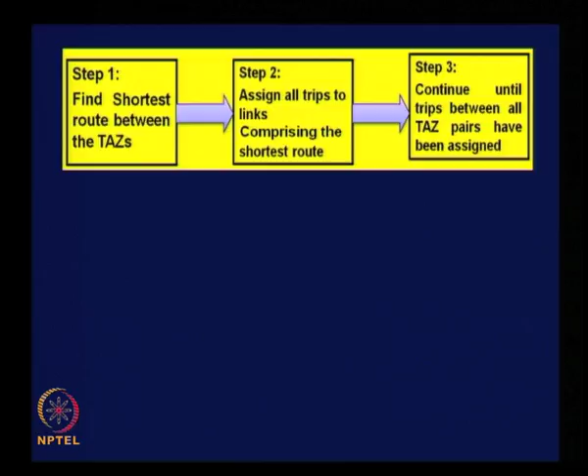This is a simple, inexpensive and fast method of route assignment, because we just develop a minimum path tree and assign the whole of the traffic to the minimum path. That is how it is very fast and simple. This method depicts the routes most travelers would use in the absence of capacity and congestion effects. Basically, we assume there are no problems related to capacity of any link or congestion developed on any particular link. We assume uncongested free flow condition on all the links. Based on that assumption, we assign traffic on all the links comprising the minimum path.

Results of this method are easy to understand and interpret. Interpretation is quite simple and understanding is also relatively easier.

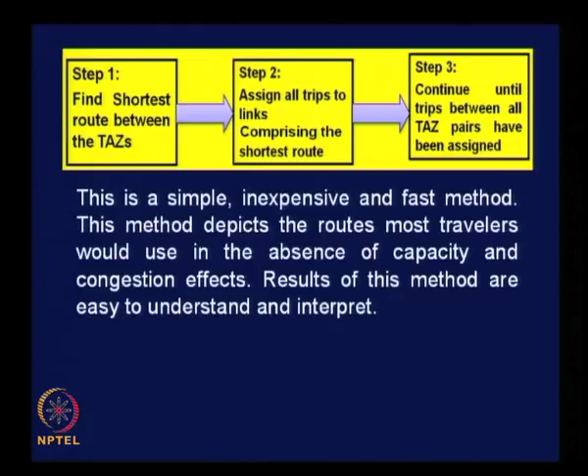Despite these advantages, this method has one serious problem. The disadvantage of this method is that it generates unrealistic traffic assignment in situations where there are minor differences in travel impedance between alternative routes.

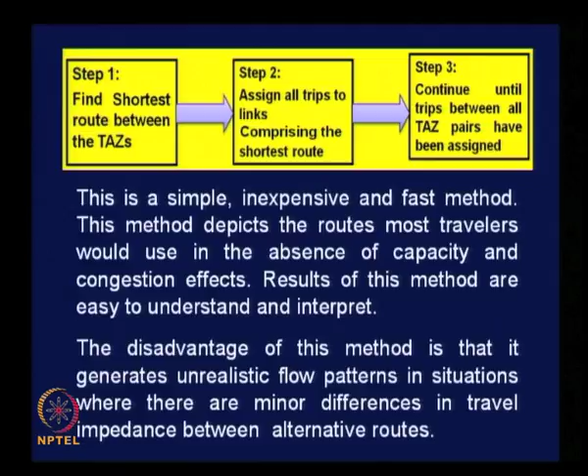Let us say we have 2 alternative routes between zones 1 and 2. If the travel time along route 1 is 11 minutes, for example, and the travel time along route 2 is 11.5 minutes, the difference is minor. In practice, these differences do not matter much. People might use either route 1 or route 2, but as per the algorithm we use for all or nothing assignment technique, the whole of the traffic will be assigned to route 1, which has a travel time of just 11 minutes, leaving the other alternative route with a travel time of 11.5 minutes empty, which is not realistic. So that is the problem with this type of assignment.

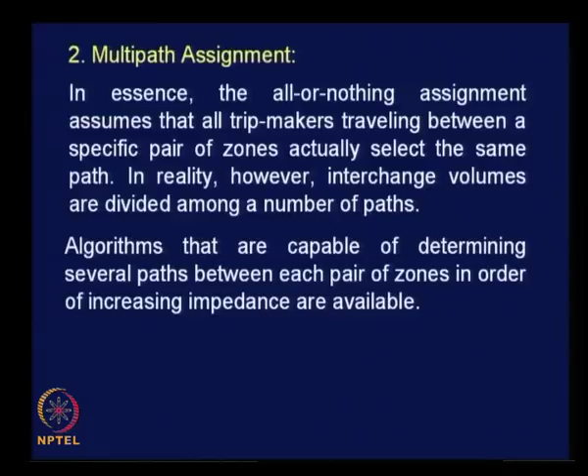The choice of route will depend on the travel time implication. Less the travel time, more is the likely traffic that might use a shorter route compared to a relatively longer route. So we need some kind of algorithm to apportion the traffic among various alternative routes. Therefore, it is possible to apportion the interchange volume between these paths according to some realistic rule.

Can anyone think of some rule to apportion traffic among alternative paths with different travel times, say 10 minutes, 11 minutes, 12 minutes, with 3 alternatives? How to apportion the traffic? One reality is that the 12 minutes path will have relatively lesser traffic compared to the 10 minutes path, because the 10 minutes path is shorter. Shall we say that the traffic taking different routes might be directly proportional to the inverse of the travel times? That is one suggestion given.

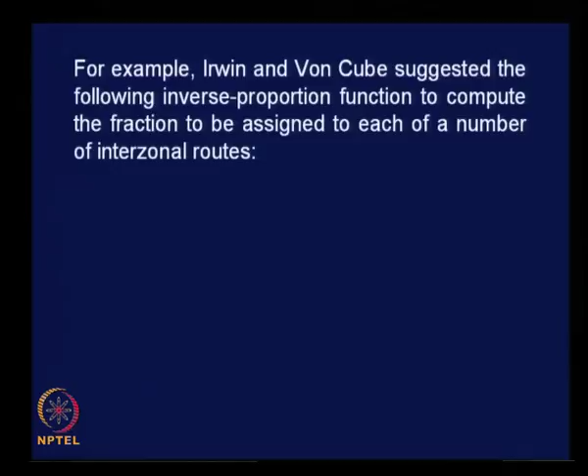Irwin and Von Cube suggested the following inverse proportion function to compute the fraction to be assigned to each of a number of interzonal routes. This is the formula suggested by Irwin and Von Cube.

PR is equal to Wijr raised to power minus 1, whole divided by sigma x equal to 1 to n, Wijx raised to power minus 1.

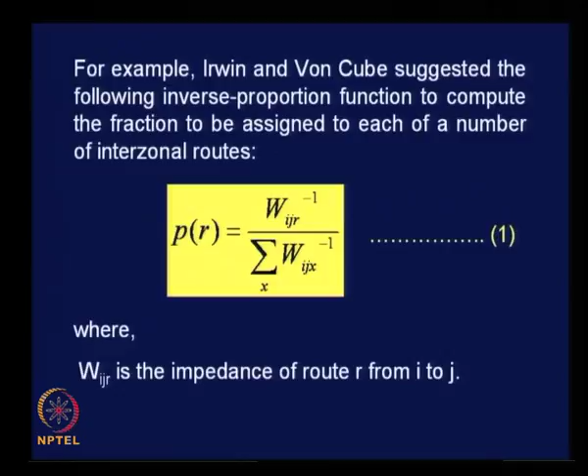Wijr here is the impedance of route R from i to j, for travel from i to j. PR is nothing but the proportion of trip assigned to route R. The inverse of travel impedance of the concerned route is taken in the numerator, and the sum of the inverse of the impedances of all the routes is taken in the denominator.

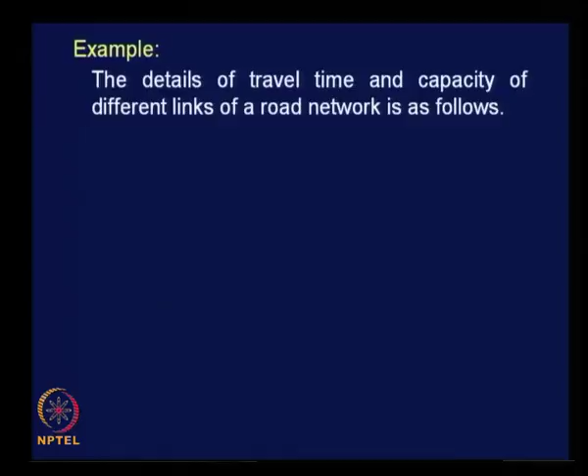Let us take a small numerical example and try to understand the multipath method of traffic assignment.

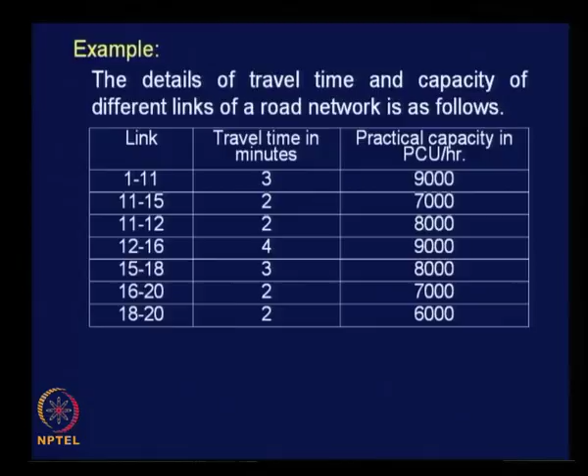You can see node numbers used to designate the links, and the question is this: assign a traffic volume of 9000 PCU per hour between nodes 1 and 20 by multiple route assignment technique. We have to assign a traffic of 9000 PCU per hour for movement from node 1 to node 20.

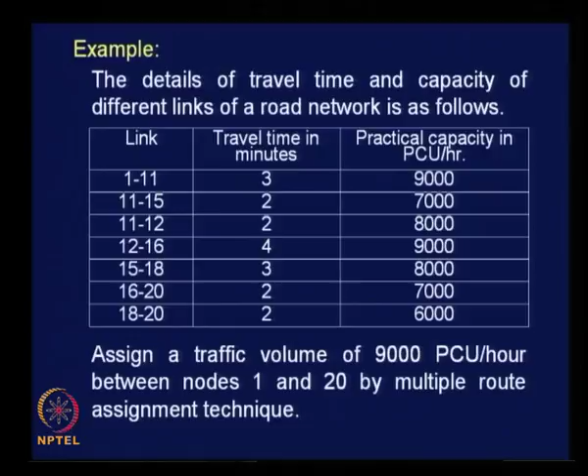Since we have just node numbers used to designate links, it will be convenient for us to make a sketch of the given information to understand the problem better. You sketch out the route network based on the information given in column 1, link information. If you do that, you will get this figure.

The link designations you may recall: 1-11, 11-12, 12-16, 16-20, then 11-15, 15-18, and 18-20.

Our interest is to find out the travel time from 1 to 20 along the 2 alternative routes, and then assign traffic based on the algorithm. What is the travel time along 1, 11, 12, 16, 20?

Travel times are indicated with white colored numbers. So, 3 plus 2 is 5, plus 4 is 9, plus 2 is 11 minutes, and the travel time along the other alternative path, namely 1, 11, 15, 18 and 20, is equal to 3 plus 2 is 5, plus 3 is 8, plus 2 is 10 minutes. So there are 2 alternative paths involving travel times of 10 minutes and 11 minutes.

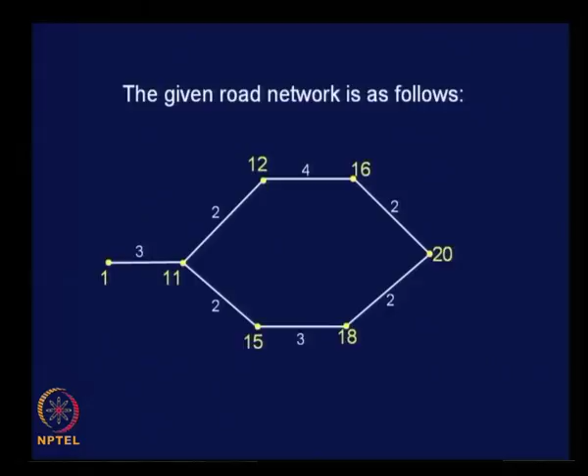So the paths are 1, 11, 15, 18, 20 involving a travel time of 10 minutes, and then 1, 11, 12, 16, 20 involving a travel time of 11 minutes. Simply use the algorithm and get the proportion of traffic to be assigned to the 2 alternative routes.

As per the equation we have seen, the proportion using route 1 is 1 by 10, inverse of the travel time implication, divided by 1 by 10 plus 1 by 11, which is equal to 0.524. The actual volume assigned to route 1 is 0.524 into the total traffic of 9000, which works out to 4716 PCU per hour. That is the traffic volume assigned to route 1 with travel time of 10 minutes.

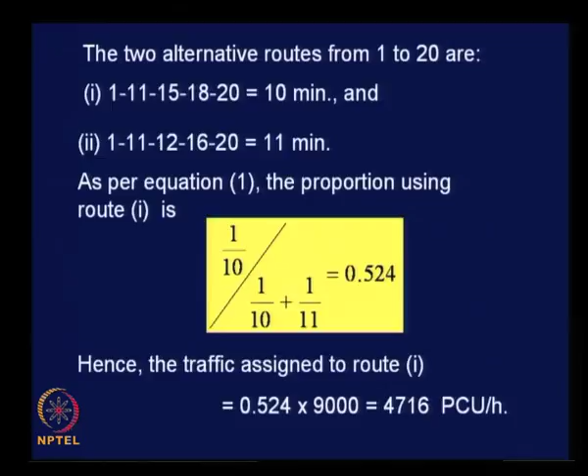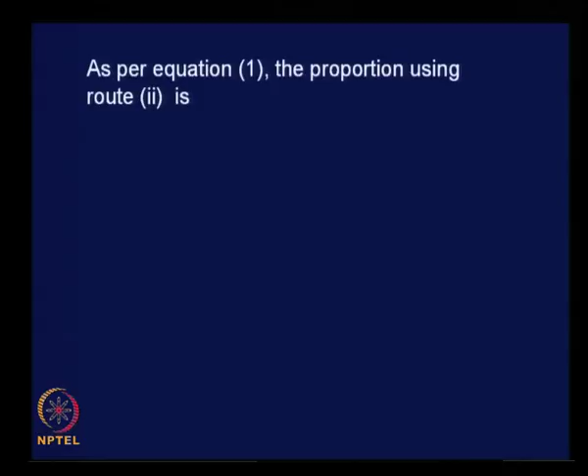As per the same equation, the proportion using route 2 will be 1 by 11 divided by 1 by 10 plus 1 by 11, which is equal to 0.476, and the actual traffic volume works out to 0.476 into 9000, that is 4284 PCU per hour. It is a very simple example, and in practice you may have more number of links involving each alternative route, and sometimes the number of alternative routes available may also be more than 2.

All the links on both the routes have sufficient capacity to take the traffic. Why are we making this statement? Because link capacity is given to us as additional information. You would have seen the third column of the table, where link capacity was given.

Suppose the assigned traffic is slightly higher than the earlier case. If the assigned traffic is more than a link capacity on a particular route, then what to do?

You are apportioning traffic along two alternative routes. Let us say in one alternative route, one of the links may not be able to take the assigned traffic volume. Let us say the assigned volume in this case, as shown here, is 4284, and if the capacity of one of the links is only 3500 PCU per hour, what do you do under such a condition?

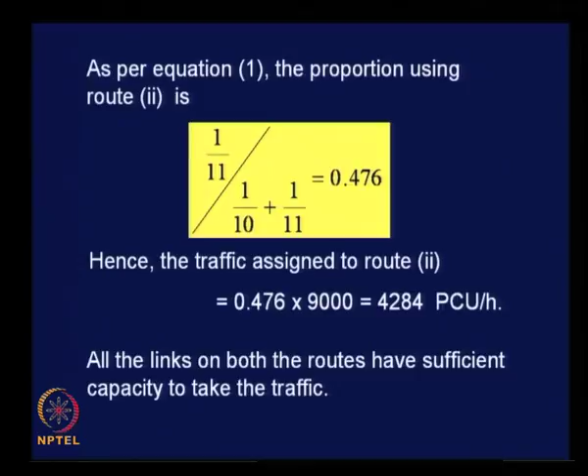It is obvious that you can assign only 3500 PCU per hour along that alternative route, and the balance has to be pushed to the other alternative route, provided the other alternative is able to take this additional traffic. That is how in practice you must manage assignment along various alternative routes. If you are given information about capacity constraint, you should be very careful and check whether the capacity is exceeded. If capacity is exceeded, try to distribute the traffic to other alternative routes.

And use of multinomial logit model. How is use of multinomial logit model relevant at this juncture? All of you are familiar that multinomial logit model can be used for mode choice analysis. We have used the model for mode choice analysis, isn't it? And is it possible to use the model for route choice analysis?

You may recall that I told you about the scope of application of the logit model. Logit model can be applied for any choice situation where randomness is involved. It could be choice between 2-3 consumable items, or 2-3 modes of transportation, or several alternative routes available for choice for making trips.

Basically, it is a question of choosing a particular route, knowing the travel time implication or total travel impedance related to each of the alternative routes. So we have a set of alternatives and we try to understand the way people choose a particular alternative. So instead of using the earlier equation involving the inverse of travel times, you can also use multinomial logit model to explain route choice, to do route assignment.

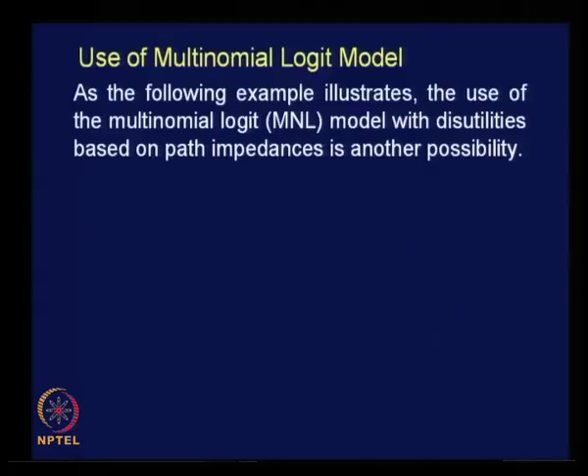So that is why use of multinomial logit model is also appropriate in route choice analysis. It is very simple, it is not going to be difficult because the basic model structure is familiar to you. And as the following example illustrates, the use of the multinomial logit model with disutilities based on path impedances is another possibility.

Let us take a small example. A multipath algorithm found the interzonal impedances in general, not travel time, total impedances of the 4 shorter paths. Why 4 shorter paths?

See, the alternatives should be comparable. There could be several alternative paths if you consider the entire road network. You can go to the next station by travelling around a circuitous route, it is also possible, right. So that cannot be reasonably considered as an alternative route. Alternatives should be reasonably real alternatives. There should basically be shorter paths.

That is where you need to understand the reason for putting the word 'shorter' here - between a pair of zones to be 1, 1.5, 2 and 3 units of disutility. Just units, it is not travel time. The bundle together is given some number as 1, 1.5, 2 and 3 units of disutility. Clear? So you can name it as travel impedance, the total travel impedance along each of the alternative routes.

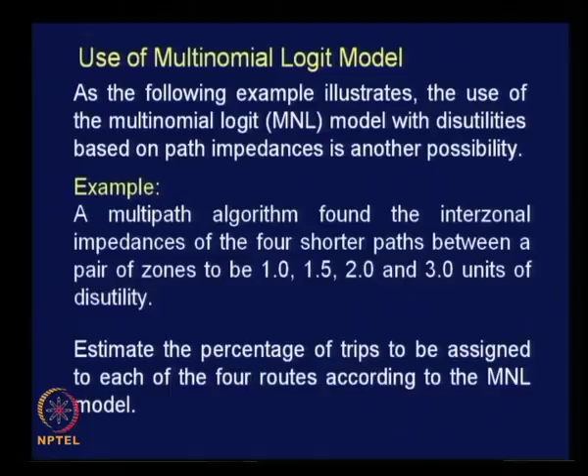Now, the problem is this: estimate the percentage of trips to be assigned to each of the 4 routes according to the MNL model, multinomial logit model. The MNL model structure is given here.

It is the same structure as we have seen earlier. The only difference is a symbol beta is introduced here. This is nothing different - this is just to indicate that the utility function Vj involves estimation of the parameters of the involved variables. It is an indicator, otherwise it has got no different meaning compared to what we have seen earlier. Where Pj is the probability of choice of alternative j, and beta is the parameter to be estimated for the utility function, which is obvious, and m is the number of alternative modes including j.

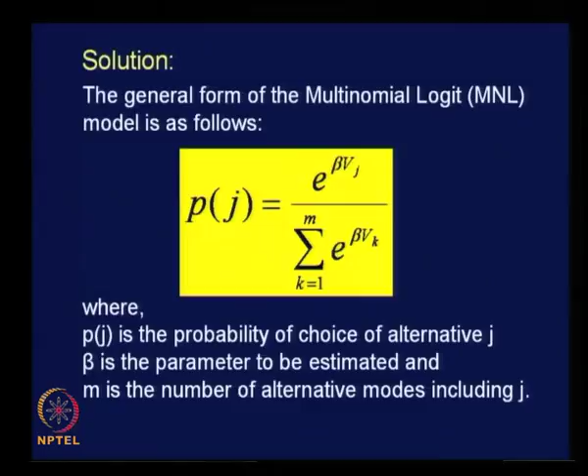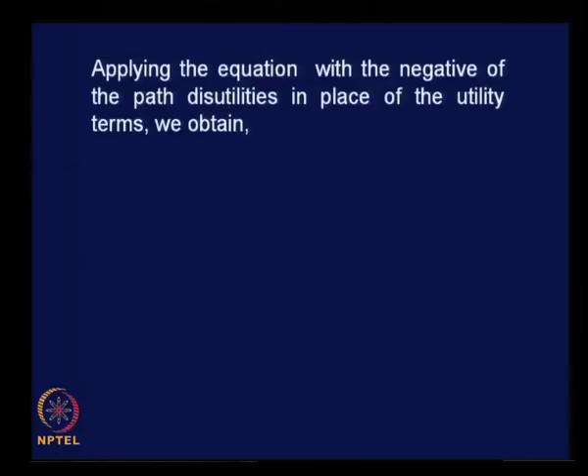That clear? Now, applying this equation with the negative of the path disutilities. Disutilities are given as some numbers, 1, 1.5 etc., and we must take negative of those values for application in the model - e power minus of something. In place of the utility terms, we obtain these results. I am just giving you the probabilities directly because it is simple substitution of the numbers in the equation.

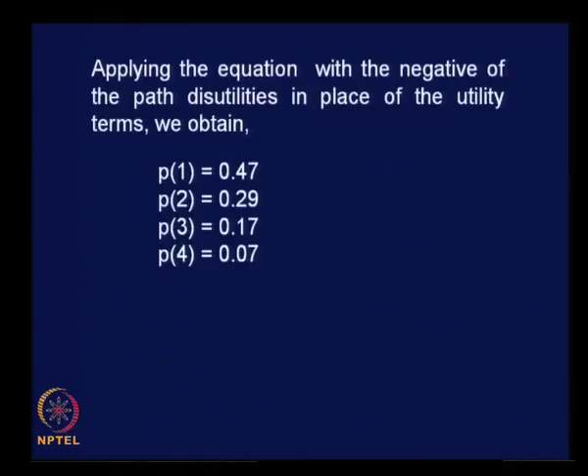Probability of choice of route 1 is 0.47, probability of choice of route 2 is 0.29, route 3 is 0.17, route 4 is 0.07. It is in descending order. You may remember the corresponding disutilities associated with routes 1, 2, 3 and 4 were 1, 1.5, 2 and 3. So when the disutility increases, we find that the probability of choice decreases. We simply substitute those numbers in the previous equation.

The computational complexity of these models should not escape the reader's attention. Of course, computationally this is a little more complex compared to the previous approach where we simply considered inverse of the travel times. But computerized algorithms that deal effectively with this repeated nature of calculations are available, so nothing to worry about. Whatever complexity is associated with the analytical process can be managed with available computer program packages.

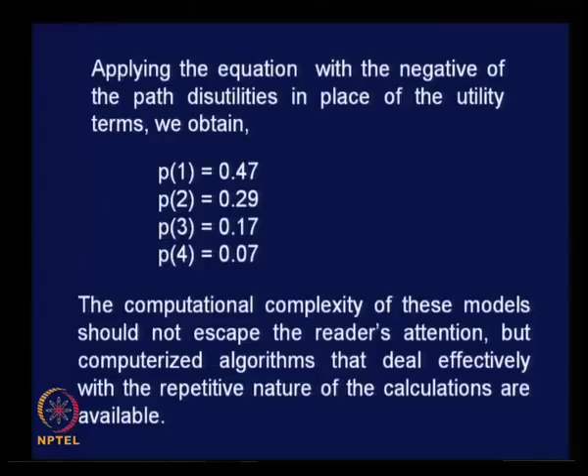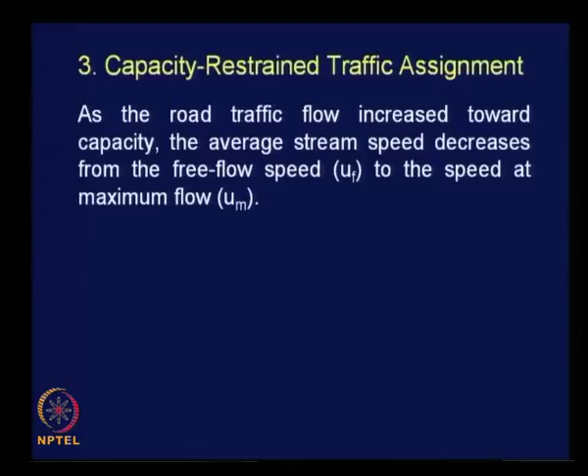Then the third method of route assignment, namely capacity restrained traffic assignment. This is a basic concept to be kept in mind in reality. As road traffic flow increases towards capacity, the average stream speed decreases from the free flow speed to the speed at maximum flow. It changes from Uf to Um, M standing for maximum flow.

Beyond this point, the internal friction between vehicles in the stream becomes severe because of reduced headway. The traffic conditions worsen to give you a level of service of E or F, which is the lowest, and severe shock waves and slow moving platoons develop when the traffic flow increases to reach capacity level.

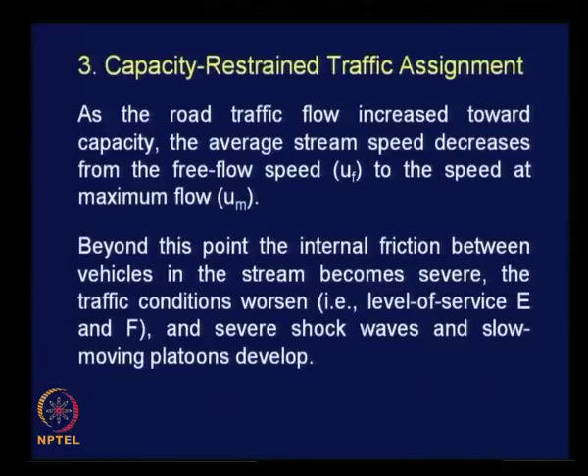It is to be noted that interzonal flows are assigned to the minimum paths computed on the basis of free flow link impedances, usually travel times. So whatever travel times we have been talking about so far are free flow travel times. But in practice, when you think of taking different alternative routes during morning peak hour, you do not perceive only the free flow travel time, you simultaneously perceive the possible traffic condition at that point of time along each alternative route, and the involved travel time under that traffic condition.

That is how we perceive the possibility of taking an alternative route when we try to take a decision in practice. So unless this aspect is taken care of, our route assignment may not be that realistic.

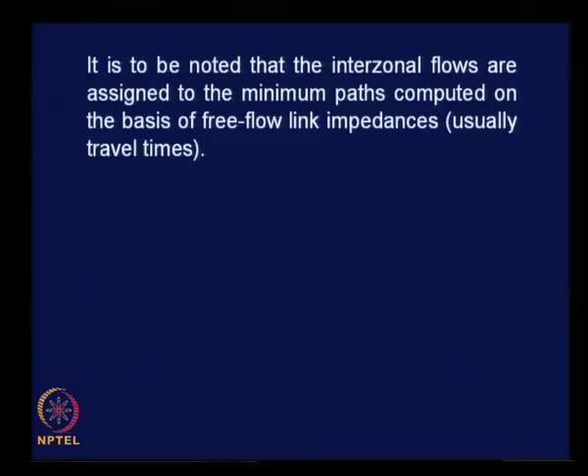But if the link flows were at the levels dictated by the assignment during the assignment process, the link speeds would be lower and the link travel times, that is impedances, would be higher than those corresponding to free flow conditions. This implies that travel times in practice may not be equal to the free flow travel time that we normally consider for assignment under all-or-nothing assignment technique or multipath assignment technique.

As a result, the minimum paths computed prior to trip assignment may not be the minimum paths after the trips are assigned.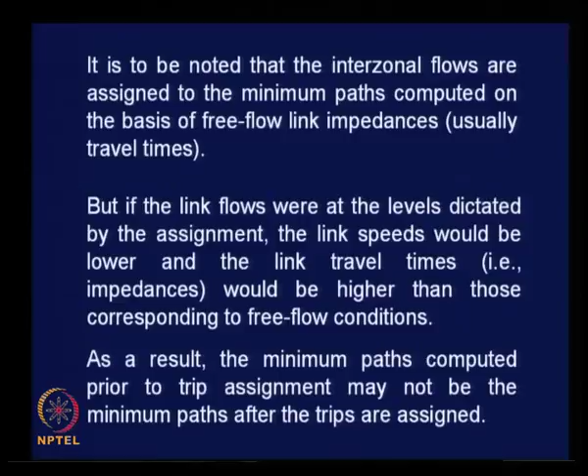You just consider a zonal pair, identify the minimum path tree, and assign traffic based on all-or-nothing assignment technique. Once you assign traffic, a set of links are loaded with traffic volume. When you take another zonal pair and assign traffic, some of the already loaded links will also likely come into the minimum path of the other pair.

In that case, if you do not consider the effective existing traffic volume's effect on travel time, you will not be doing the exercise accurately. So the point made here is when you assign traffic in steps, you must realize that the travel time along the links increases, and that increase should also be taken into account simultaneously while you are doing assignment, so that ultimately at the end of the process the travel time you take will be reflective of reality.

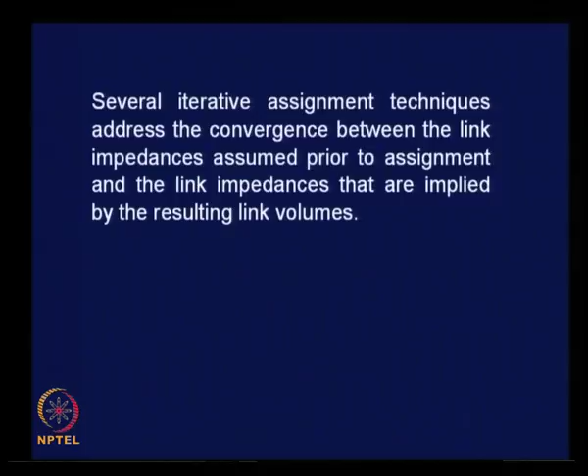For this purpose, several iterative assignment techniques address this particular convergence between link impedances assumed prior to assignment and the link impedances that are implied by the resulting link volumes. These techniques are known as capacity restraint methods.

There are minor variations, several approaches under the capacity restraint technique. We just talk about the general principle implied or involved in the capacity restraint method of traffic assignment, which basically involves consideration of the assigned traffic volumes while estimating the travel time and the resulting minimum path tree that employ capacity restraints.

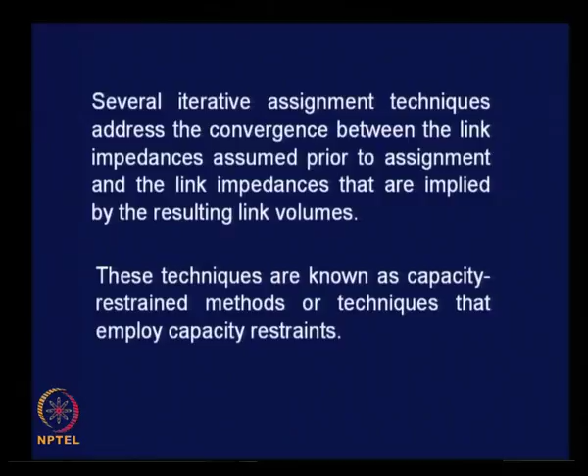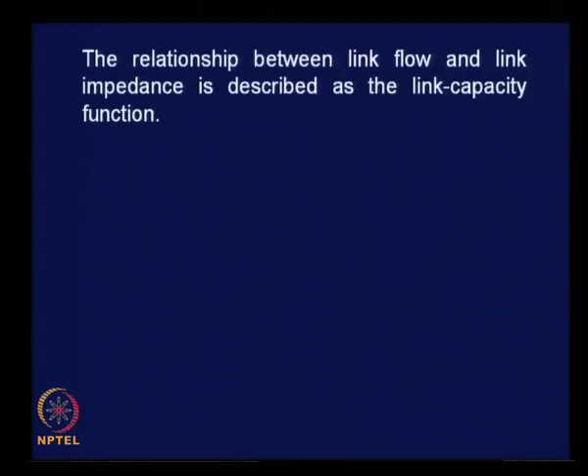The relationship between link flow and link impedance is described as a link capacity function. The key to this process is understanding the relationship between link flow or link volume and link speed. So when you assign some traffic flow onto a link, subsequently the speed is going to be less and the involved travel time is going to be more. So you should know what is the relationship between traffic volume and traffic speed.

If you assign, say, traffic volume to an extent of 20% of capacity of a link, what will be the extent of reduction of speed from free flow speed? That question has to be answered if you want to effectively apply the capacity restraint method of traffic assignment. That is a prerequisite.

Several such functions are found in the technical literature. A number of researchers have come out with functions relating traffic volume and traffic speed. The functional form developed by BPR, Bureau of Public Roads, USA, is expressed mathematically as follows, and is more commonly used by different agencies and countries. This is the BPR equation, which is very simple.

W is the impedance of a given link at flow Q. We are interested to know the impedance on a link at a given flow level, given here as W. W bar is the free flow impedance of the link. Under free flow condition, we should know what the impedance or travel time implication is, given here as W bar. Q is the link flow, the actual flow at any point of time, and Q max is the link's capacity.

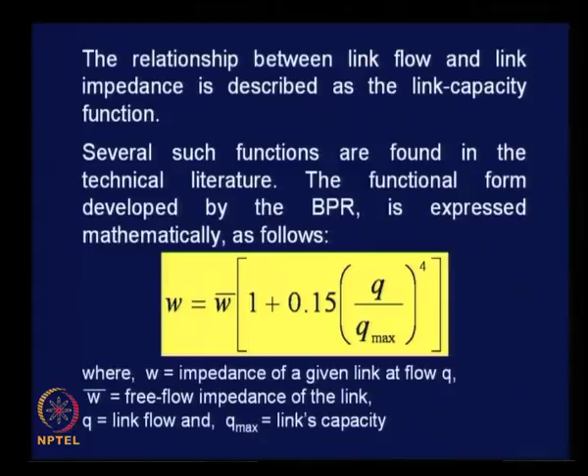W is given in terms of W bar, estimated as a free flow impedance multiplied by some factor. Looking at the multiplying part, you get numbers 0.15 and an exponent of 4. These numbers are the result of calibration of this equation based on field observed data in the United States. So we can call this an empirical equation which relates the travel impedance on a link at a given traffic volume to the free flow impedance condition, W bar.

Please remember, this is for the condition prevailing in the USA. But if you perceive the difference between free flow condition and capacity flow condition on Indian roads, the percentage is going to be much more.

What is the free flow speed for a motor vehicle, for a car, on urban roads in Indian cities? When you are allowed to drive freely as you desire, what speed will you maintain on urban roads? Still, you cannot drive very fast blindly, you have to be careful. Maybe let us say the free flow speed is 70 kilometers per hour.

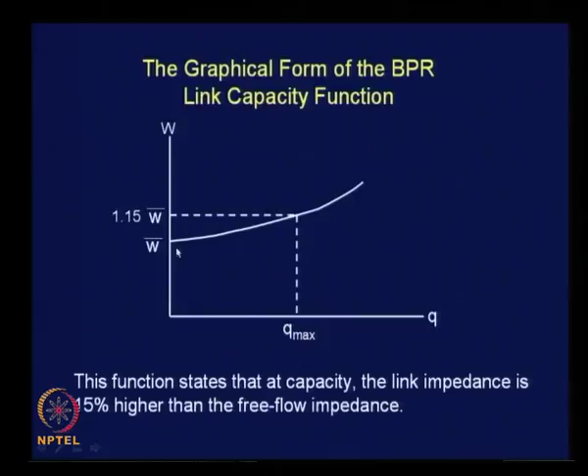When the traffic is near capacity on the same road, can you imagine the speed you will be able to maintain? Roughly about 20 kilometers per hour or even less. There will be a drastic reduction. So obviously, this number is not going to be valid for Indian conditions. That is to be remembered very carefully. We should not simply assume this 15% and try to apply it for conditions prevailing here. Even in the US, there were questions about these calibrated values, and subsequently changes were made.

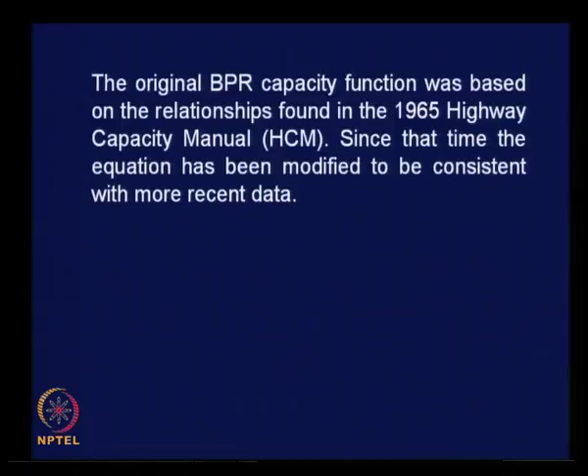The original BPR capacity function was based on relationships found in the 1965 Highway Capacity Manual. The equation we have seen pertains to the traffic condition, roadway and traffic condition that prevailed in the 1960s. Since that time, the equation has been modified to be consistent with more recent data. One modification was to substitute parameters alpha and beta in place of the constant values 0.15 and 4, allowing these parameters to take different values depending on facility type, design speed, the number of signals and other interruptions per mile, and a few other roadway and traffic characteristics.

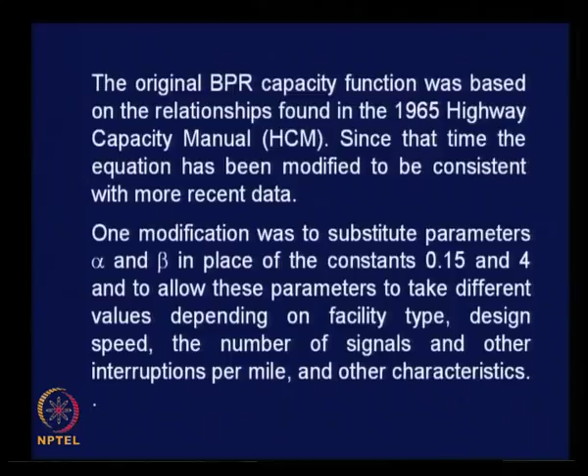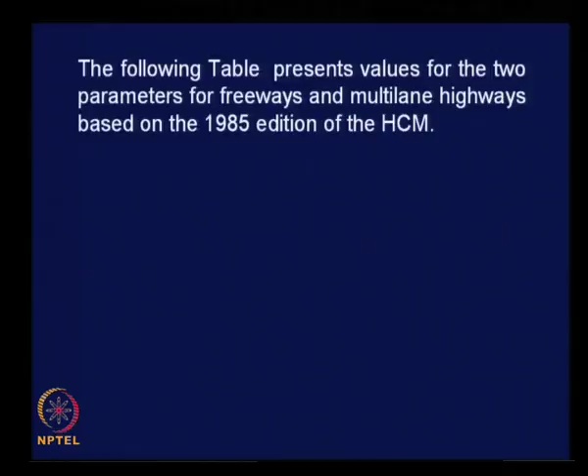They gave the values in tabular form in the year 1985. In the 1985 edition of HCM, you find this information. They classified roads into two types: freeway and multi-lane roads. Freeways are roadways with unrestricted traffic flow condition, while multi-lane roads have frequent interruptions for traffic flow. Constrained traffic flow condition prevails on multi-lane roads, and freeways have unconstrained traffic flow condition.

The design speeds given were three values: 50 miles per hour, 60 miles per hour, and 70 miles per hour for both categories of roads, with the values of alpha and beta given separately for each category. In general, you can find that the values of alpha for multi-lane roads are relatively more compared to freeways, and when you look at beta, it is less.

This implies what? You can look back at the equation you have seen and try to perceive the effect of traffic volume and speed. Normally, on inferior type of facility, the effect will be more significant compared to superior type of facility. That is the general understanding, and that is what is meant by these relative changes in the alpha and beta values.

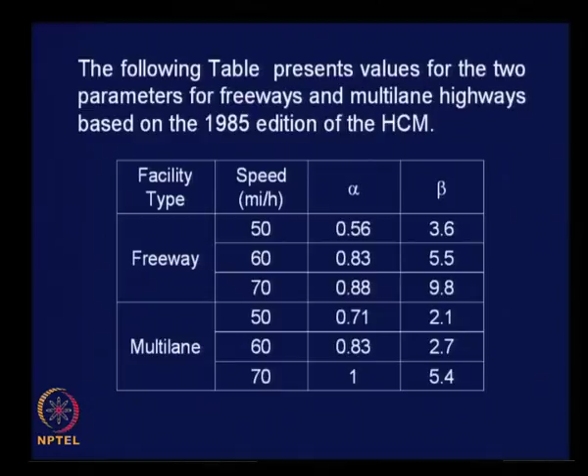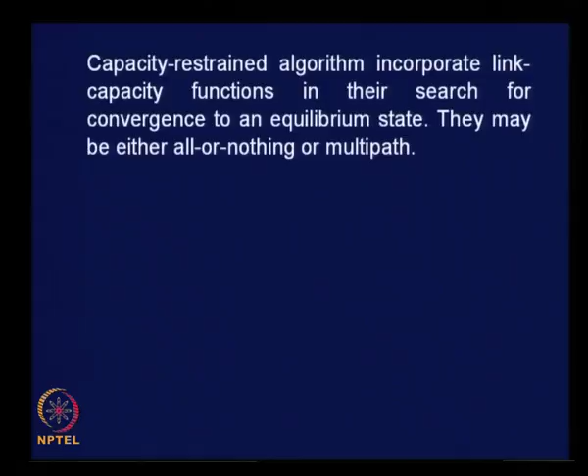Capacity restraint algorithms incorporate link capacity functions in their search for convergence to an equilibrium state. They may be either all-or-nothing or multipath. This statement is very important, so I will repeat it: capacity restraint algorithms incorporate link capacity functions in their search for convergence to an equilibrium state. This is a component of the general method of route assignment.

This capacity restraint technique helps us bring in a kind of equilibrium in traffic flow in the road network, with due consideration to change in travel time because of change in traffic volume during the assignment process. But the actual assignment technique adopted will still be either all-or-nothing or multipath assignment. We follow only these first two basic methods. Capacity restraint assignment is only the part which enables better application of all-or-nothing or multipath assignment techniques.

An example of the former, all-or-nothing assignment technique, is an algorithm developed for the Chicago Area Transportation Study, the CATS study, where the following assignment procedure is applied. Now we are going to see how to apply all-or-nothing assignment technique with incorporation of the principle of capacity restraint.

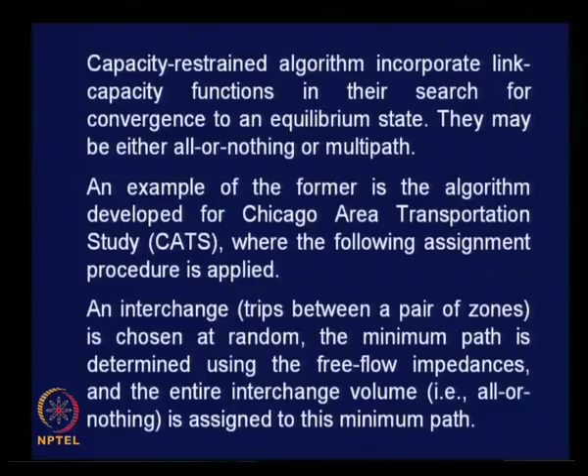You may have thousands of links and nodes, but when you consider one interchange, one zonal pair, the number of links and nodes involved may be very small compared to the total number. In that case there's nothing wrong in assuming free flow condition and assigning traffic — that is not the end of it, it is only the beginning.

So that is what is done as step 1. Then the impedances of the links that make up this path in step 1 are updated according to the assigned flows, and another interchange is randomly chosen for similar treatment.

So after assigning traffic we change the impedances or travel times for all the involved links. Is it possible or not? We take one pair of traffic zones and assign traffic from one zone to another.

After identifying the minimum path tree, a set of links will be loaded with some traffic. Because we assign some traffic, for subsequent assignment on the same link when we consider some other zonal pair, we need to know the exact travel time. It will not equal the free flow travel time, because we already have some traffic assigned on these links.

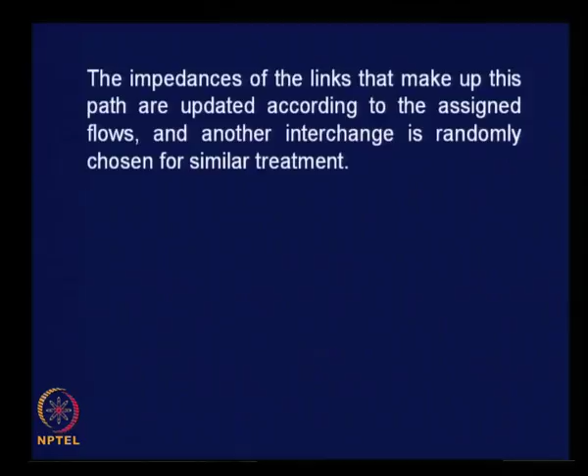The procedure ends when all interchanges are considered. When you do this mechanically, you will find that you are simultaneously changing the travel impedance for the concerned links, and this process enables you to realistically assess the travel impedance and assign the traffic. This is what was done in the CATS study.

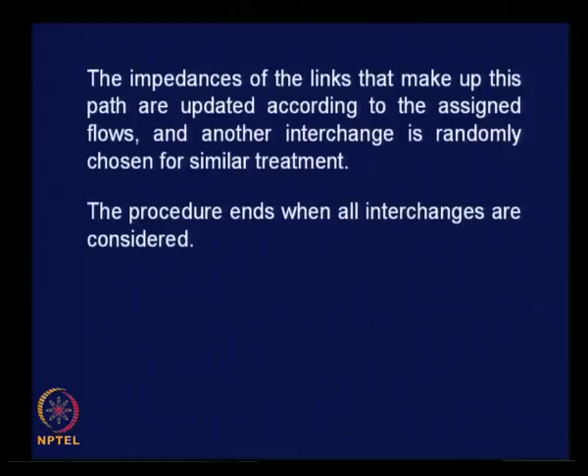Although not realistically reproducing particular interchange flows—if you consider a specific zonal pair, it may not be very realistically interchanging, reflecting the actual interchange—the incremental updating of link impedances is expected to result in realistic estimates of the equilibrium in link flows. Ultimately, at the end of the exercise, you will find that there is some equilibrium maintained in the whole of the transport system network. That is the idea.

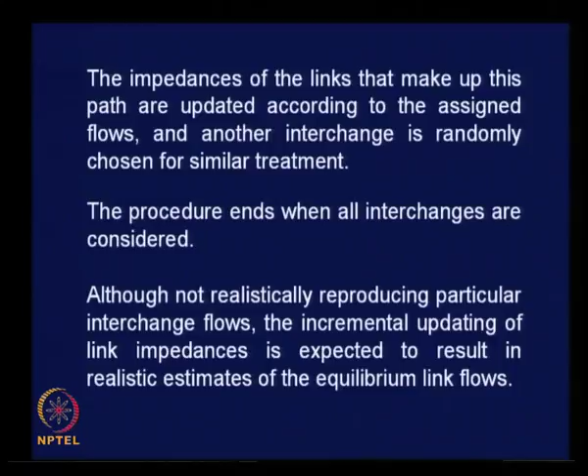Now let us see how to go about doing the same exercise by multipath assignment technique, incorporating capacity restraint in the multipath assignment procedure. A multipath extension of the same CATS method begins with an uncongested network, or network under free flow condition, finds all of the minimum paths, and assigns a portion, say 20%, of each interchange volume to these paths.

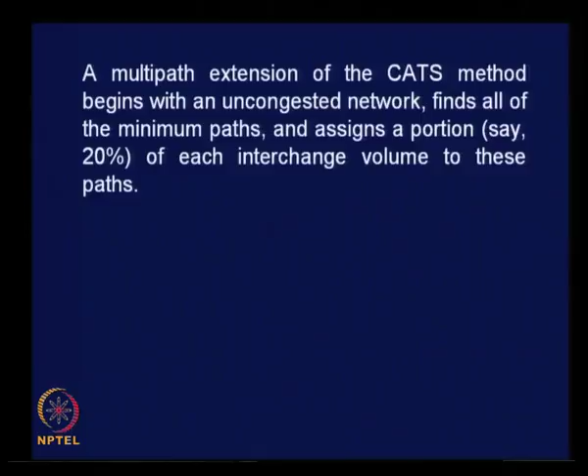Are you able to follow this statement? What we do is, we consider all the zonal pairs to start with and identify the minimum path for zonal pair travel. That means the minimum path for any movement from one zone centroid to another zone centroid, for the whole of the urban area or road network, is first determined. Minimum path for all cases is first found, then you assign a portion of the total traffic volume between zonal pairs initially to start with. Do this for all the zonal pairs again.

For example, you take 20% of the total traffic volume and do the assignment for all the zonal pairs covering the entire road network. That means the whole network will be loaded to an extent of 20%.

Now you revise the travel impedance based on the assigned traffic volume. Once you put 20% of traffic, your travel time is not going to remain the same—it is going to increase—and you have the relationship between traffic volume and traffic speed. So get the speed for each of the links after assigning 20% of traffic, and then work out the corresponding travel impedance in terms of travel time. So that is the new travel time for you.

Once you have changes in travel time, you will find the minimum path trees also change. Again, before you start the next assignment process, you must determine the minimum path tree again for all the zonal pairs covering the whole of the network. Once you complete that, you assign another 20%, say for example. So, like that you do assignment in stages and complete the process covering the whole of the traffic volume, maybe in 2, 3, 4 or 5 stages.

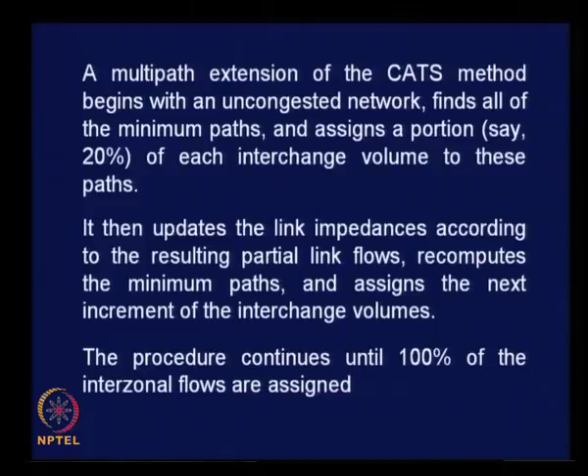So that is about the 3 methods of route assignment. All these discussions are relevant for assigning traffic when private or personal transport modes are used.

Then how to assign traffic when the travelers use transit service? In the case of private transport modes, we easily convert person trips into equivalent vehicular trips and then just assign traffic in terms of number of vehicles. But in the case of transit, they are plying on fixed routes, and you cannot just convert the person trips into equivalent number of transit vehicles.

Even from a traffic zone, if you convert all the person trips into equivalent vehicle trips, you may end up with say 1.5 wagons of train service. That is not the realistic way. There should be some other procedure to be followed for assigning transit trips.

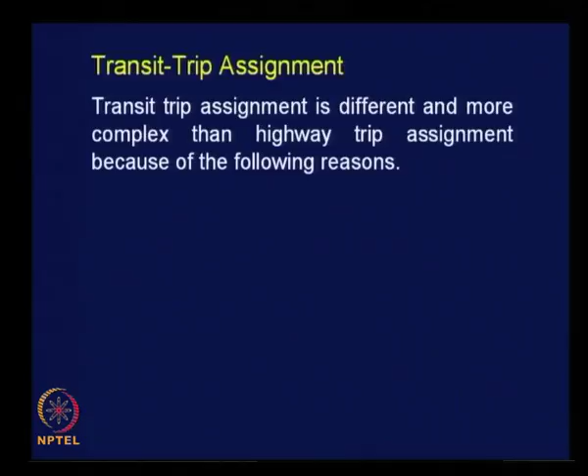Transit trip assignment is different and more complex than highway trip assignment because of the following reasons. The first is this: the network of transit services is different from that of personal vehicles. That is one thing—the network is totally different. Links in this network include bus or rail service running between two stops or stations. The definition of links or nodes are not relevant for transit trips in the same way.

As far as transit trips are concerned, say for example, the transit service that you consider is a bus service—each bus stop is a node, not the intersections. Each bus stop will be considered as a node in your transit network. Similarly, each railway station will be a node in your rail transit network. That is a major difference.

Many of the public transit services share road links with private vehicles, so their speeds will be changing from link to link. You cannot have a generalized free flow speed, etc. This complexity has to be tackled by some means. I am just listing the differences between transit assignment and the previous case. Okay.

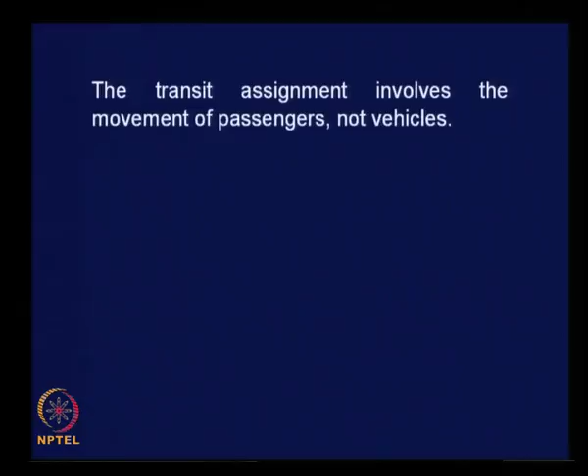The transit assignment involves the movement of passengers, not vehicles. So we must consider only passengers to be moved using the available transit service. If there are 100 people taking a bus during morning peak from a zone, you push them into the available transit vehicles in batches. Let us say the frequency of bus service in 1 hour is about 5 on a particular route. Then divide this total number into 5 batches and push them into the buses. So we are assigning only person trips as far as transit assignment is concerned. It is a major difference.

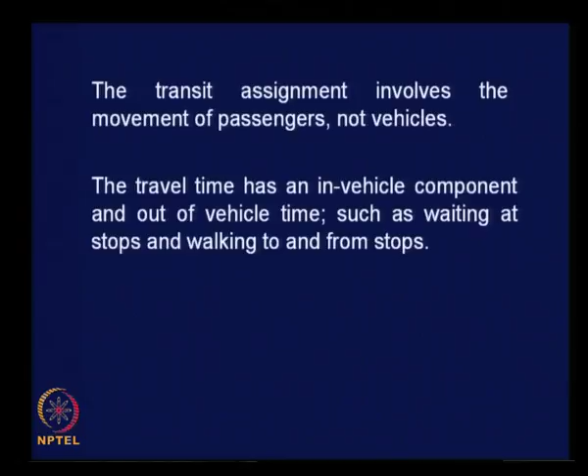The travel time has an in-vehicle component and out-of-vehicle time, such as waiting at stops and walking to and from stops. So when you think of travel time components, you should not just think of only in-vehicle travel time when you estimate travel times in the case of transit trips.

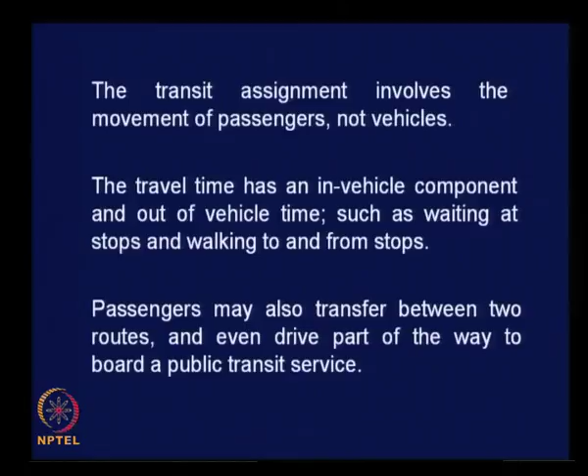Passengers may also transfer between two routes and even drive part of the way to board a public transit service, use a bicycle to go to the railway station, park the bicycle and take the train, or use a motorized two-wheeler. So it becomes a multi-mode transportation. All these effects are to be brought into your analysis process. I am just listing the complexities only.

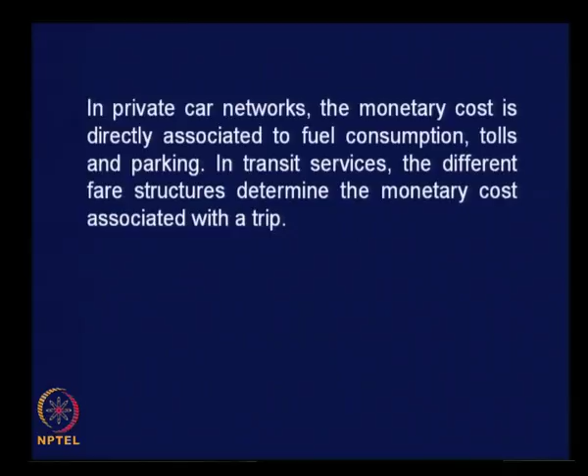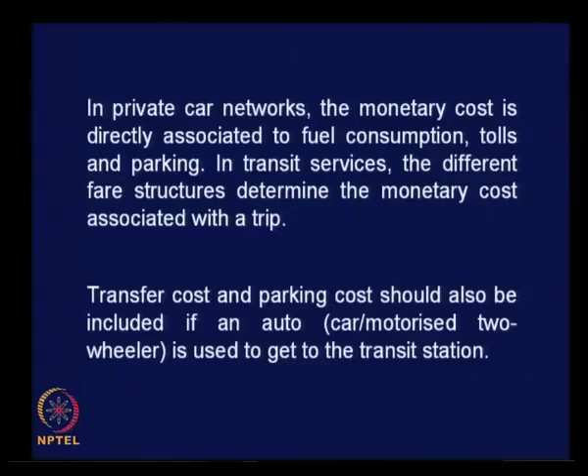In private car networks, the monetary cost is directly associated with fuel consumption, tolls and parking fees. In transit services, the different fare structures determine the monetary cost associated with a trip. If you are including a cost component in your travel resistance, this difference has to be understood clearly. Transfer cost and parking cost should also be included if an auto, car, or motorized two-wheeler is used to get to the transit station, as I mentioned earlier. So these are the differences between transit assignment and route assignment in the case of personal transport vehicles.

For some OD pairs, there may be sections in the path where more than one parallel service is available. Let us say the travel time implication is 50 minutes. For the first 10 minutes, the person may have only one transit service available, and later on for the next 30 minutes of travel, there may be train service as well as bus service available in parallel. Some might switch over to the other transit mode because it is more convenient or comfortable compared to the other one. So this kind of change, availability of more choices, should also be taken into account when you assign traffic.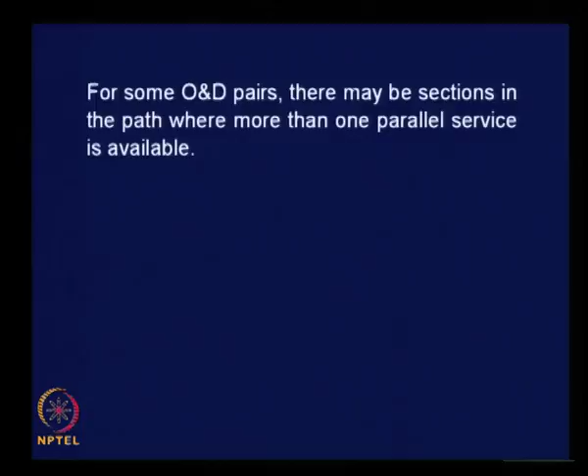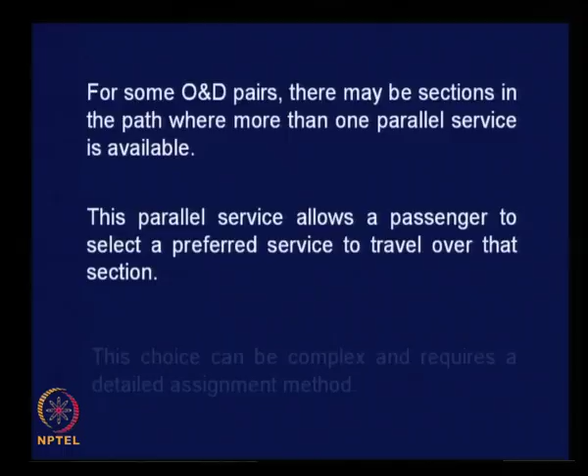This parallel service allows a passenger to select a preferred service to travel over that particular section. This choice can be complex and requires a detailed assignment methodology to be followed.

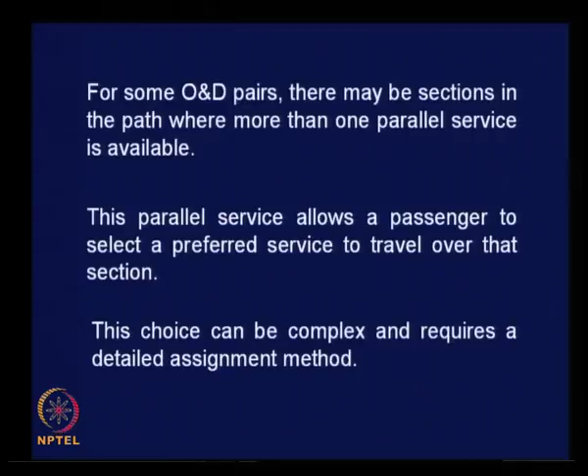That is about the complexities related to transit assignment. Now look at the master flow chart and find out where we are. We are almost at the box, last but one box on the left hand side.

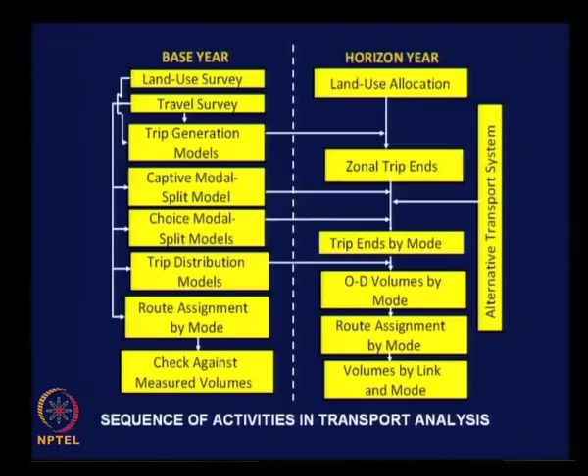The final step is check against measured volumes. Once we assign traffic, it is possible for us to actually check the traffic volume link by link, because we theoretically assign traffic and create traffic volume. You can actually measure the same traffic in the field, and it is possible for us to compare the field observed traffic volume with your assigned traffic volume. That is the method of checking the correctness of your result.

There is no distinct calibration procedure for assignment models, please understand. It is only a comparison of the actual field observed data with the result you get through the assignment process. Compare both, and if they are matching satisfactorily, you stop. Otherwise, there is something wrong somewhere and you go backwards and check every step, each of the 4 steps, identify the errors, redo the exercise and come back to the assignment stage and again compare with the actual field observed traffic volume.

Repeat the process until there is a reasonable match between your assigned traffic and actual field observed traffic. So with this we complete our discussion on route assignment. All 4 analytical steps are completed at this stage.

To summarize what we have done today, we discussed 3 assignment techniques, namely all-or-nothing assignment technique, multi-path assignment technique and capacity restrained assignment technique. We have seen numerical examples to understand all-or-nothing assignment technique as well as multi-path assignment technique clearly, and we also know now the capacity restrained procedure is an input for actually assigning traffic either by all-or-nothing assignment technique or multi-path assignment technique.